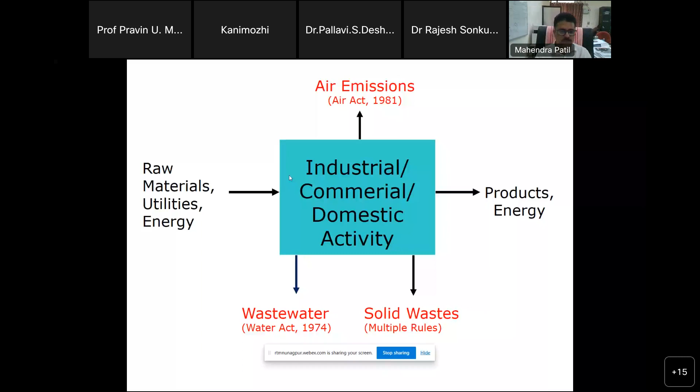And last one is battery waste. Battery waste is generated from electrical and electronic equipment in commercial and industrial applications. So these are the different types of waste generated from our day-to-day household, commercial and industrial activity. Since these are generated from different sources, they have different rules and regulations. So we'll see what are the rules and regulations associated with this waste.

So we will see quickly what are these wastes. First one and most dangerous is the hazardous waste. Hazardous waste is a solid, semi-solid or non-aqueous waste which is essentially generated by industry. When we say it is hazardous waste, it has to be from industrial sources. From household also we generate some hazardous waste like spent batteries, toilet cleaners, various cleaning agents, but the quantity as compared to industrial hazardous waste is very, very less.

So hazardous waste is defined by 4 chemical properties. The waste may have ignitability. Ignitability means potential of a waste to cause fire. Flash point is a criteria which is used to define the ignitability. Suppose the waste has a flash point less than 60 degrees centigrade, then the waste is called ignitable waste and it comes under hazardous waste. Another criteria for hazardous waste is corrosivity.

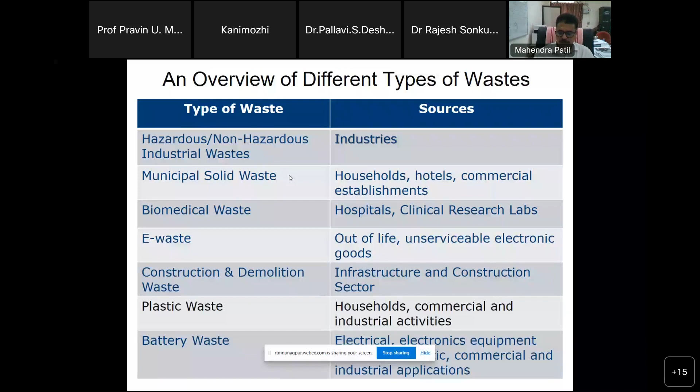Sir, slides are not changing, sir. So which slide are you seeing now? This slide you have seen, different types of waste. Okay. Yes, sir. So can you see the next slide now? Yes, sir. Yeah, this is hazardous waste, sir. Yes, exactly. So I'm discussing this slide now. Hope everybody is able to see this slide. Okay, sir. All of you are seeing? Yes, sir.

So as I told, hazardous waste is a solid, semi-solid, aqueous or non-aqueous liquid waste, which is essentially generated by industry. And hazardous waste is defined by four distinct properties: ignitability, corrosivity, reactivity, and toxicity. Waste is called ignitable if it has flash point less than 60 degrees centigrade. A waste is called corrosive if it has pH less than 2 or more than 12. A waste is called reactive if it reacts violently with water or air at normal temperature and pressure.

And waste is called toxic when it contains toxic heavy metals, pesticides, inorganics, and organics. So if waste bears any of these characteristics, then it is called hazardous waste. So typical sources of hazardous waste, as I told you, are from industry.

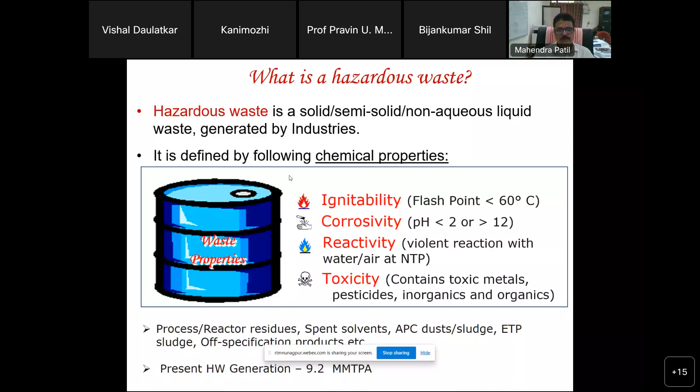Many times, if our products are not matching certain specifications, such products are discarded, and these discarded products also come under hazardous waste. So at present, based on the inventory done by various regulatory agencies like the State Pollution Control Board, it is estimated that India generates about 9.2 million metric tons per annum of hazardous waste.

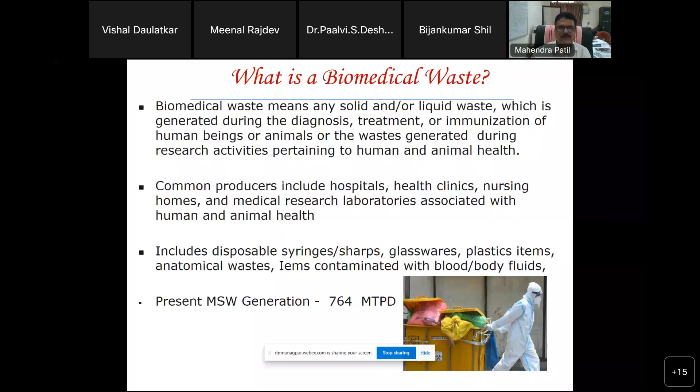Common generators of plastic waste include industry. They use huge packaging material, and a huge quantity of this packaging material is discarded as waste, which is plastic based. Then commercial establishments and households.

The plastic waste which is discarded includes plastic bottles like PET bottles, plastic bags, plastic films, packaging materials. We have seen during functions and marriages a lot of plastic cutlery used - plastic plates, spoons, bowls. So a lot of plastic waste is generated from such activities. Then toys, plastic toys, various consumer goods, textiles - these are all different types of plastic waste discarded from industrial, commercial, and household activities.

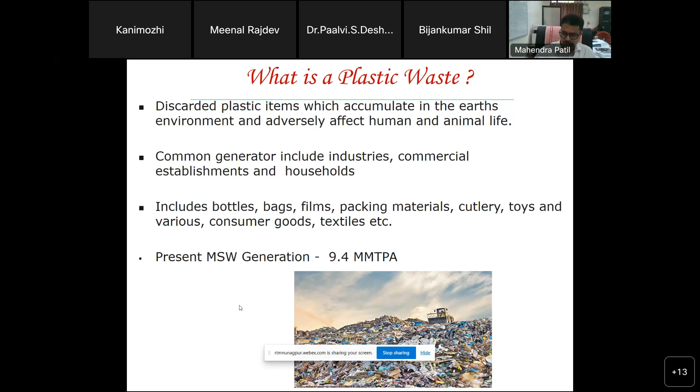E-waste is nothing but end-of-life electrical and electronic equipment, whole or in part, which are discarded as waste by consumers. Consumer could be household people, commercial establishment, or industry. So whatever electronic equipment we use, once the life is over, we discard it as a whole.

For example, if a washing machine can no longer be used, it is discarded as a whole, like washing machine, fridge, TV. But sometimes we give it for repairing. So during repairing, for example, someone will say the PCB has gone, the PCB needs to be changed. So it is repaired, and that part, the PCB, is discarded.

So it could be discarded as a whole, or it could be discarded in part. This is during manufacturing, refurbishment, and repairing process - whatever such waste is generated or discarded, that is e-waste.

Common generators of e-waste include industries, commercial, and domestic consumers. The type of e-waste includes IT and telecom equipment, TV, refrigerator, washing machine, air conditioner, lamps, industrial control panels - these are the typical e-waste which are discarded. It is estimated that about 3.19 million metric tons of e-waste is generated and discarded every year.

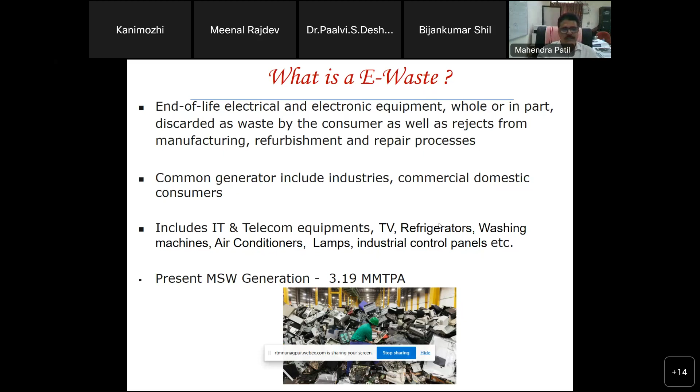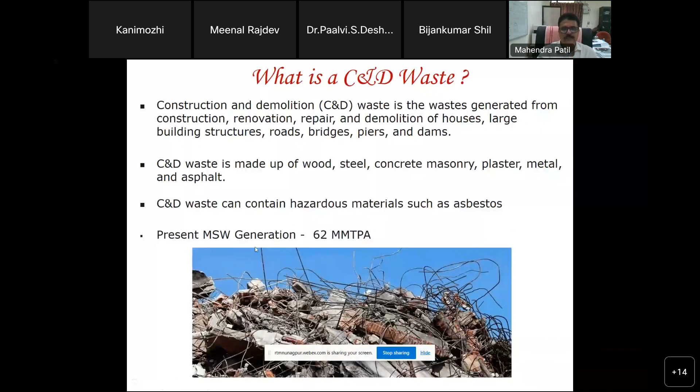Presently, construction and demolition waste generation amounts to 62 million metric tons per annum. Actually it is written MSW generation, but it should be C&D - construction and demolition waste - which is 62 million metric tons per annum generated in our country.

Similarly, battery waste is end-of-life batteries used in various electrical and electronic equipment, consumer products, and vehicles. Once their life is over, the battery is discarded as waste.

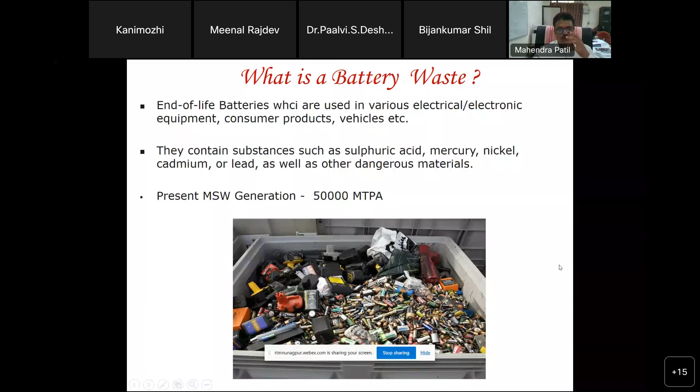So we have seen now what are the different types of waste which are generated. Now we will see what are the challenges associated with management of these different types of waste.

When we talk about challenges associated with this waste, this means we have to see what are the environmental concerns associated with it. Why is management of this waste so important? What happens if we don't handle, collect properly, and don't treat and dispose of our waste properly? What kind of environmental challenges or concerns can it have? So for this, we need to first review the historical waste management practices.

What we have been doing with our waste in the past many decades, and what environmental concerns have occurred due to this past waste disposal practices, we need to see. Then we have to also review what we have been doing at present with our waste. Based on review of historical practices, environmental concerns associated with waste management, and present waste management practices, we can develop a proper strategy for future waste management systems.

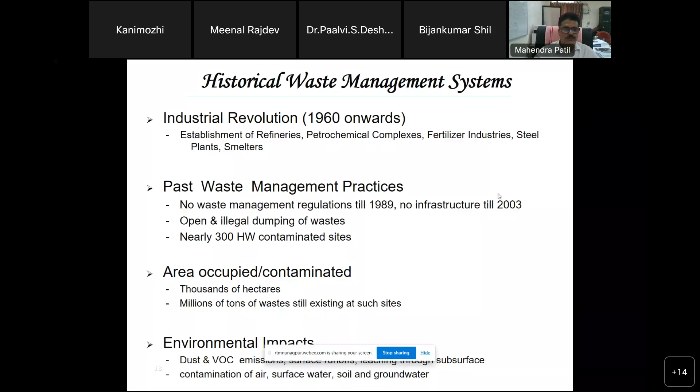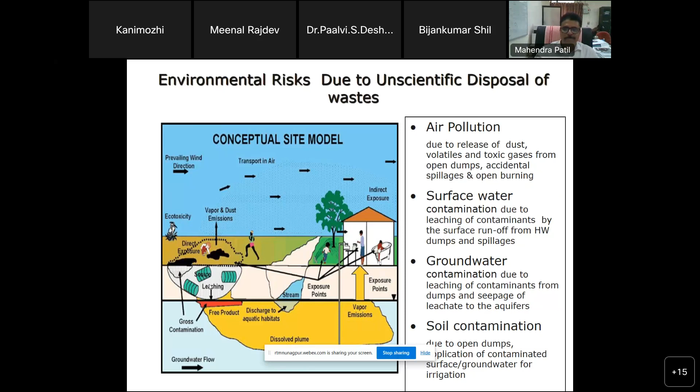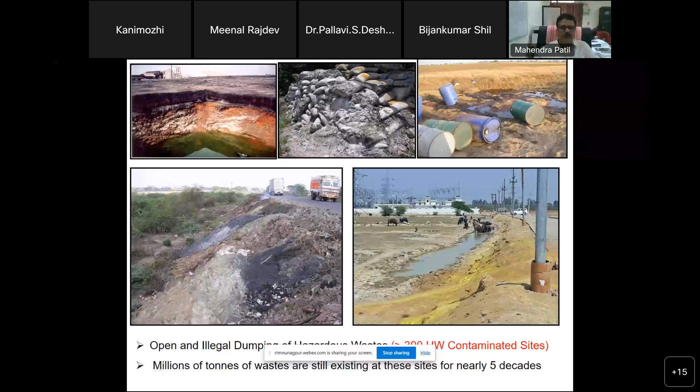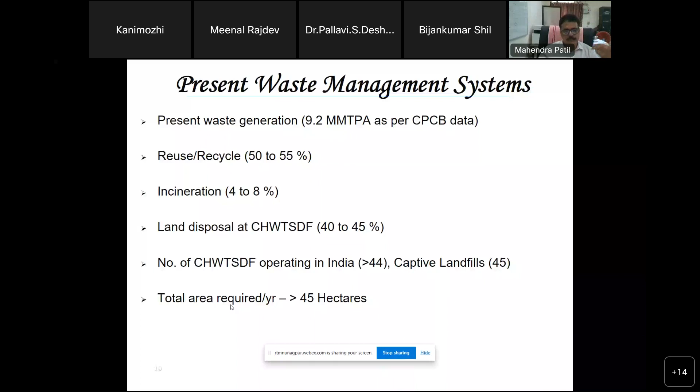Okay, now we have seen different types of waste, and I told you in the beginning, each waste, depending on the source, has different rules and regulations. For hazardous waste, actually the first legislation was notified in 1989, but it was observed that those rules were not very effective. So all these rules are frequently amended, depending on their implementation and the outcome of these rules. So for industrial waste, whether it's hazardous or non-hazardous, we have the Hazardous and Other Waste Management and Transboundary Movement Rules.

So the latest rule was notified in the year 2016. Similarly, for municipal solid waste, we have solid waste management rules. Again, these rules were amended in 2016. For biomedical waste, we have a separate rule called biomedical waste management and handling rule. Again, it was amended in 2016.

Similarly, for e-waste, we have a separate rule called e-waste management and handling rules, 2016. For construction and demolition waste, we have a separate rule called construction and demolition waste management rule. Plastic waste, we have a separate rule, plastic waste management rule. Similarly, for battery waste, we have battery waste management rule.

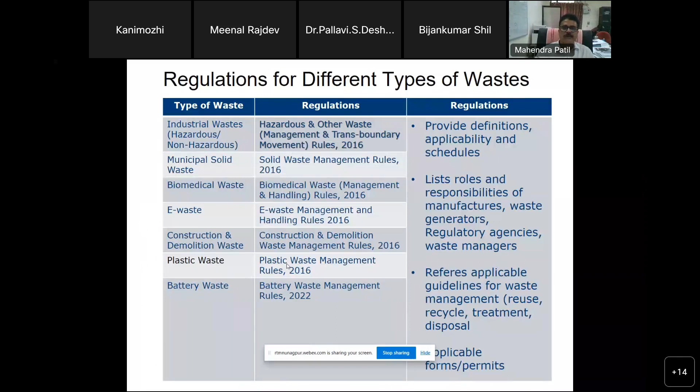This is an example of again regulation on hazardous waste: the Hazardous Waste and Other Waste (Management and Transboundary Movement) Rules, which were last amended in 2016. As per these rules, there are a total of 8 schedules. Schedule 1 lists 38 industrial processes which are likely to generate hazardous waste. So all kinds of industries existing in India are listed there, and what kind of hazardous waste is generated from these 38 industrial processes is also listed. Then there is Schedule 2.

Schedule 2 is again divided into Class A, Class B, and Class C. Schedule 2 provides the leachable concentration of the hazardous constituent in the waste. For example, I am an industry. I generate say 10 tons of ETP waste. So if my ETP waste contains say more than 50 milligrams of cyanide, this becomes hazardous waste.

If it contains say 20 milligrams of leachable concentration of mercury, then it becomes hazardous waste. So like this, there are Class A, Class B, and Class C, which provide different concentration limits for various hazardous constituents. Then there is Schedule 3, which deals with hazardous waste which is either imported or exported. A lot of wastes are imported and exported for reuse, recycle, treatment, and disposal.

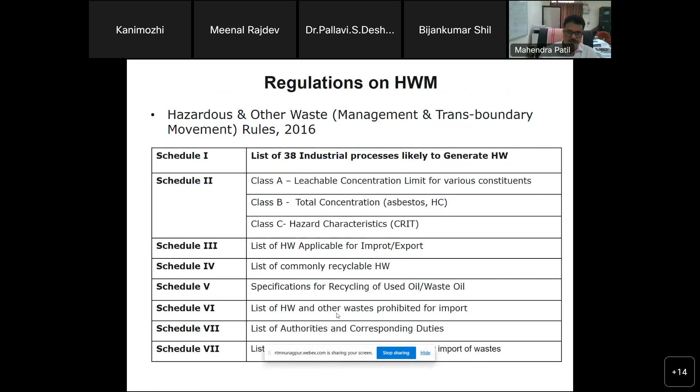This is an example of Schedule 1 of the Hazardous Waste Rules 2016. You can see, hope you are able to see this slide. Schedule 1, HWM Rules 2016. Yes, sir.

Yes, sir. Okay. So you can see the first column, there is an industrial process, for example, petrochemical process and pyrolytic operations. So if the industry falls under this category, petrochemical industry, there are 9 types of hazardous waste generated from this activity. So like this, total 38 industrial operations, 38 industrial processes have been listed in Schedule 1.

So you can see if you are studying any industry, suppose it is say a petroleum refinery. So the petroleum refinery will generate oily sludge emulsion. It will generate spent catalyst. It can generate spent slop oil. It can generate organic residue. It can generate chemical sludge from ETP. So it is very well defined what kind of hazardous waste are generated from the different activities.

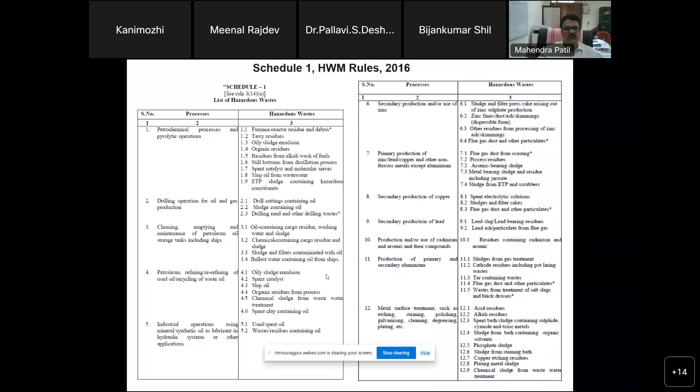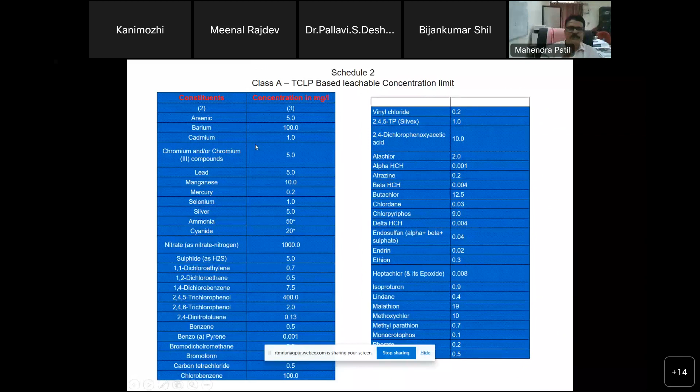This is an example of Schedule 2. I told about a different concentration of hazardous constituent present in the waste. Suppose I generate a waste, and if it contains say 5 milligram per liter leachable concentration of arsenic in the waste, then my waste becomes hazardous waste. So like this, there are almost 46 parameters which are listed. So we have to see whether the waste contains any of these parameters. If it contains any of the parameters, then the waste is categorized as hazardous waste.

Suppose I'm having an industry. I'm generating at present say 500 tons of waste per year. So whether I can bring it down from 500 tons per year to say 50 tons per year or 100 tons per year, and what are the options available for minimizing the waste, I need to do this study.

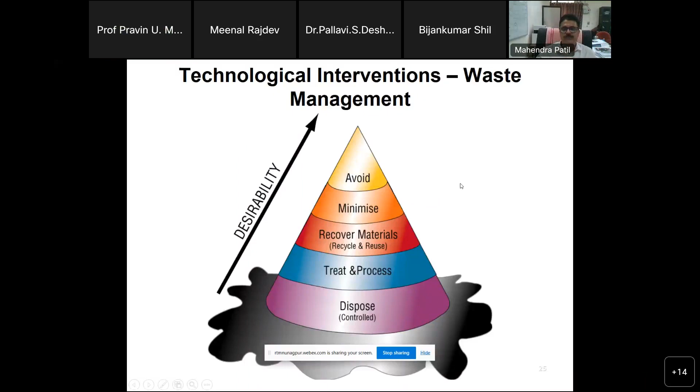So we'll see what are the examples. This slide, the option was option 1, avoid waste generation. You can see this slide? Yes, sir. Yeah, it is visible, sir. Yeah. So this is just an example.

I'm showing the example. We have seen in the previous slide, the option was to avoid waste. So here an example, this is for caustic soda industry. Caustic soda, you might be aware, previously the process used for caustic soda was mercury cell process. In this process, mercury was used as one of the raw materials. So whatever waste or sludge was generated from the mercury cell process, it used to contain a lot of mercury. So it was a hazardous waste.

But then a lot of research was done and an alternative process was developed. This is called membrane cell process. So in the membrane cell process, mercury is not used. So the sludge generated from this membrane cell process is not a hazardous waste. So simply by changing from one process to another process, we have avoided the waste generation.

Nowadays, the membrane cell process doesn't generate mercury sludge. So what I mean to say is, if we go for cleaner and greener production processes, we can avoid waste generation. You might have heard the term green chemistry. Green chemistry is a process to manufacture any product without generating any secondary pollutant such as hazardous waste. So this is an example of how we can avoid waste generation, simply by going for a cleaner and greener production process.

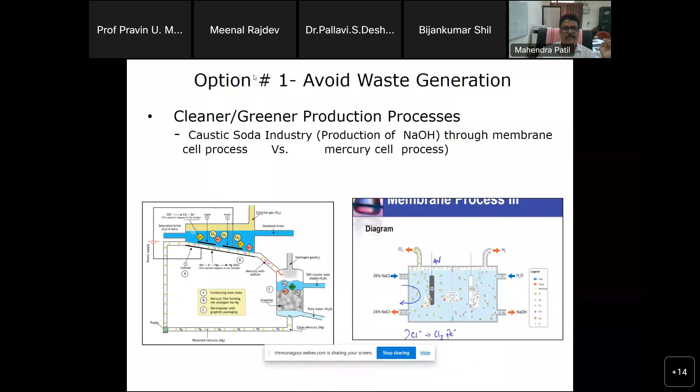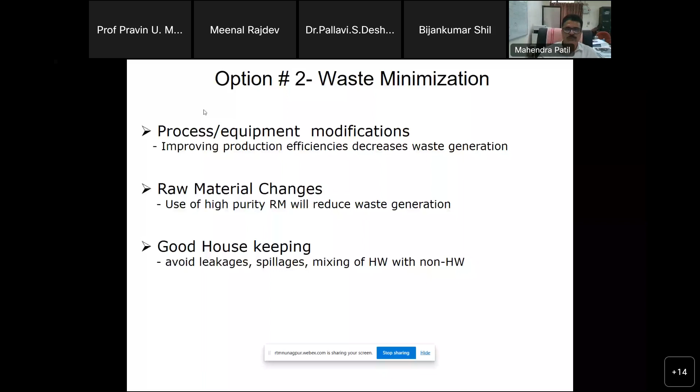The third option is recovery, recycle, and reuse. As I told you, some waste is likely to be generated and you're not able to minimize it 100%. So whatever waste is generated, we have to see whether it can be reused, recycled, or recovered for any purpose. There are two options. One is on-site recycling - for example paper, plastic, kitchen waste, everything.

If we do proper segregation, we can recycle the paper by giving it to the Raddiwala and get some revenue. If we segregate plastic and glass bottles and give them to the Kabadiwala, he will give you some money. Proper segregation helps recover, recycle, and reuse the waste. This is on-site recycling. The same applies for industry - waste generated by an industry could be utilized in some other process of the same industry. That is called on-site recycling.

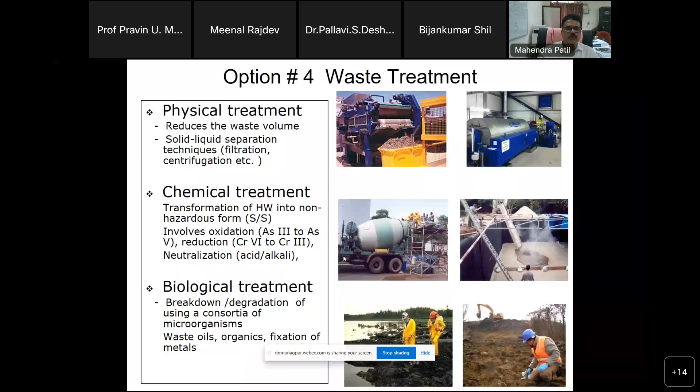So with physical, chemical, and biological treatment, the waste can then be disposed of in a controlled manner. This is the fifth option, the last option, which we call the ultimate and final waste disposal option. There are two systems available, two technologies available for ultimate disposal.

Suppose if we consider human beings, when a human being dies, we either cremate him. If you visited crematoria, we either burn him, or depending on the religion, if Hindu people will burn him, Muslim people will go for...

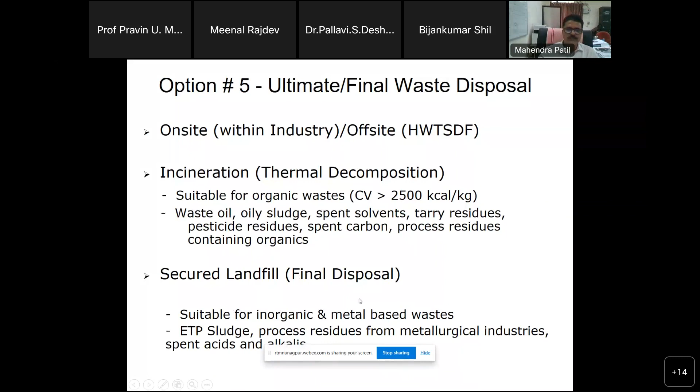Examples include ETP sludge, process residue from metallurgical industries, spent acid and alkalis. So all such waste, if it has no use, has to be disposed of in a landfill.

The gases generated during combustion are further incinerated or further combusted. They are treated through various air pollution control equipment and discharged to the environment. Whatever ash is generated in the process is collected and disposed of in a secure landfill.

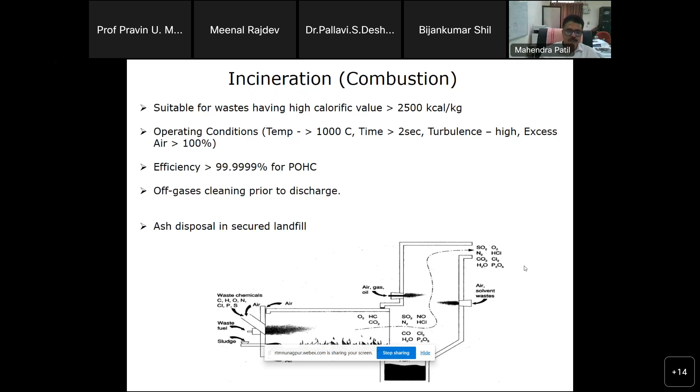So finally, the secure landfill is a containment system which is designed and constructed to contain the waste so as to minimize release of contaminants to the environment.

Before putting the waste in the landfill, as I told you, it has to be treated chemically. We need to solidify and stabilize this waste. There are guidelines given by the Central Pollution Control Board on how hazardous waste incinerators should be designed and operated, and how secure landfill systems are designed and operated.

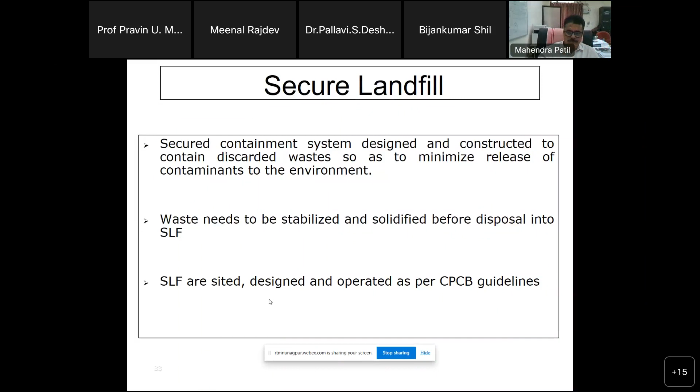Before the waste is disposed of, we need to select the site which can be developed into a secure landfill. The area is excavated, and then there are different layers of liners. First, we have a 150 centimeter clay liner placed. Above that, we use an HDPE liner of 1.5 mm thickness. Above that, we need to provide a leachate collection system. And then there is another set of clay liner and synthetic liner. So it is a very, very secured system.

This liner system is placed, and then we start disposing of the waste. Each landfill has a capacity, designed for say 20 to 25 years. So once you construct the landfill, you go on putting the waste for 20 to 25 years. When its capacity is over, then it has to be finally covered.

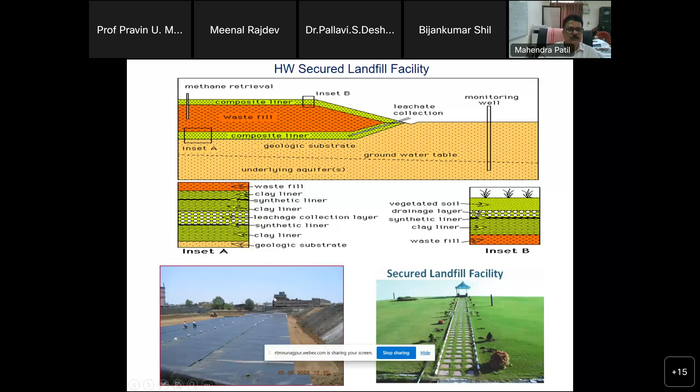So this is the last option for any waste management. These are some of the pictures of how the secure landfill is constructed. Similarly, the options for municipal waste management - we have seen for solid waste, hazardous waste.

Now these are the treatment options for municipal solid waste. Again, for proper management of municipal solid waste, waste has to be properly collected and segregated so that it can be recycled to the maximum extent. This is valid for the dry fraction like paper, plastic, glass, metal. It can be collected, segregated, and recycled.

The second fraction of municipal solid waste is our leftover food, we call it wet waste. This wet waste can be subjected to anaerobic digestion. You can generate methane, and this methane can be used as a source of energy, for producing power. So this is the second option for municipal solid waste management.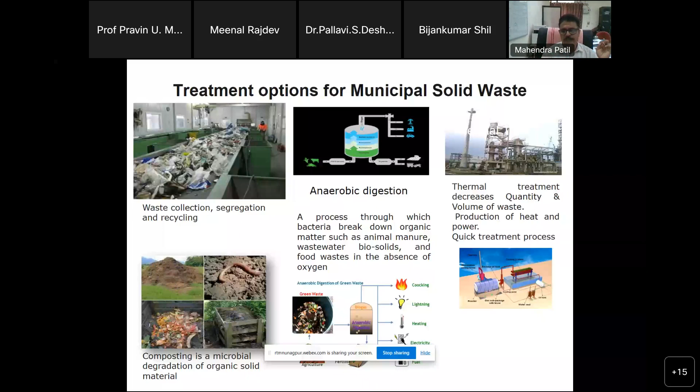The third option is thermal treatment, like incineration. Whatever mixed waste is generated, you subject it to thermal treatment at 850 to 900 degrees centigrade. If you generate some energy, this energy can be recovered and utilized for generating power. So these are the options for municipal solid waste management.

NEERI is associated with management of municipal solid waste in Goa. We are working as an expert agency to them, and we have helped them design and construct a plant for management of municipal solid waste. As of now, this is one of the best plants existing in the country for municipal solid waste management. The waste is collected by the local municipal corporations and panchayats. There is a lot of awareness among residents in Goa - the Government of Goa has run various awareness programs, and people collect their waste in two different fractions, dry waste and wet waste, and it is collected and transported separately. It comes to this plant, which is designed for a capacity of 250. There are two plants: one is 250 tons per day, the other is 100 tons per day.

Here, whatever dry fractions are received are further segregated into 10 fractions - paper, plastic, metal, and so on - and it is reused and recycled to the maximum possible extent. The wet waste here is converted to biogas, and they have captive electricity production using this biogas. Whatever residue is generated after biogas generation is converted to compost. So if you happen to visit Goa and are interested, you can visit this plant. This will show you how municipal solid waste is managed in a safe, scientific, environmentally sound manner. It is worth visiting.

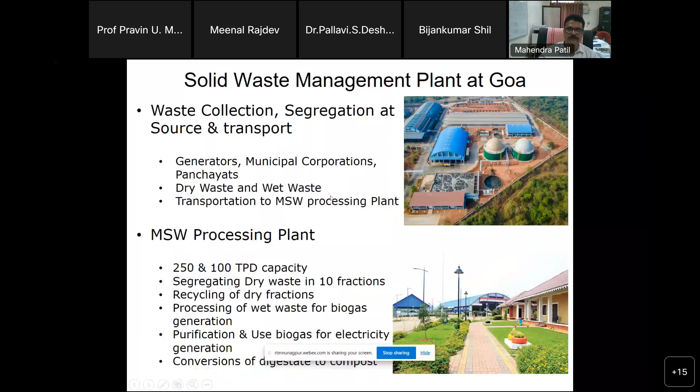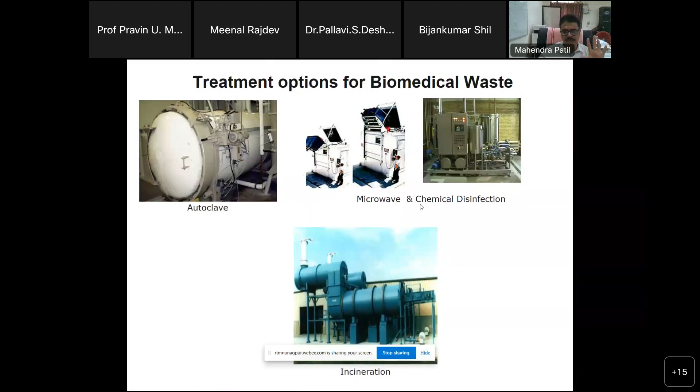Similarly, for treatment options for biomedical waste, you can go for autoclave, microwave, or chemical disinfection, and ultimately whatever residue like anatomical waste or plastic waste is there, with no option for reuse or recycle, it has to be discarded through incineration. Incineration is the ultimate option for biomedical waste.

Similarly, for plastic waste, first we have to reduce the generation of plastic waste. Then whatever plastic waste is generated, we have to reuse, recycle, and recover, and only a small fraction which you cannot do anything with can go to landfill. But ultimately, landfilling of plastic waste is to be avoided. It has to be reduced, reused, recycled, and recovered. Okay.

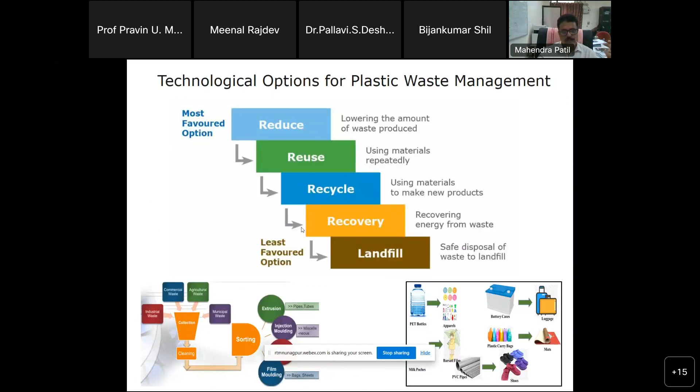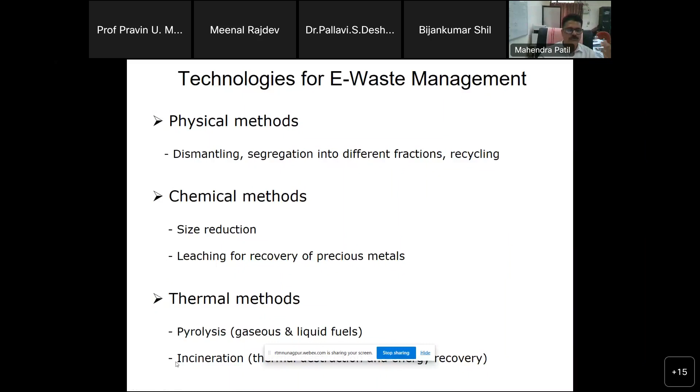There are also thermal methods available like pyrolysis, for generation of gaseous and liquid fuels, and any residue like plastic residues, you need to go for incineration. So this is how the waste can be managed.

As far as NEERI is concerned, we have been working in solid and hazardous waste management for almost the past 35 years. We deal with municipal solid waste, hazardous waste, biomedical waste, all kinds of waste. We do basic and applied R&D. We have very good teams of chemical engineers, environmental engineers, mechanical engineers, biologists. We have various tools and software available, and a very good laboratory with analytical facilities.

So with this infrastructure, skill and highly qualified manpower, we have been dealing with this waste for the past 3 decades. We have done more than 100 projects on various issues of solid and hazardous waste management. In this process, we provide our services for waste inventory, waste audit, waste treatment, waste minimization, reuse and recycle, environmentally sound management, and remediation of contaminated sites.

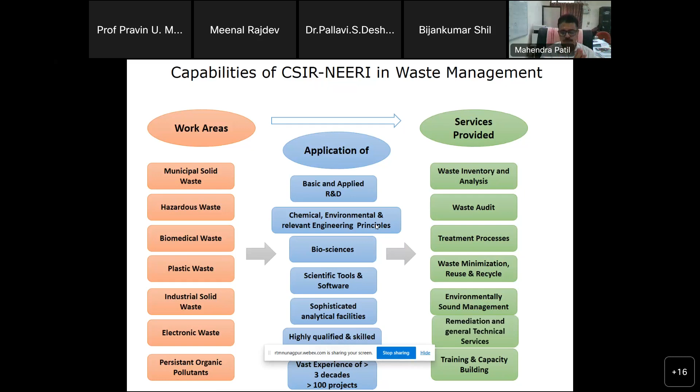We also conduct a lot of trainings and capacity building programs. If you visit our website, a calendar of all such training programs is available. So if any one of you is interested, you can avail our services for any of the activities. Okay.

These are some of the significant projects we have done in the past. This one is full-scale treatment and disposal of arsenic waste. Here we have disposed of almost 700 tons of highly toxic, highly hazardous arsenic waste at Zuari Industry, Goa. Right now, we are doing a full-scale remediation project for a mercury contaminated site at Kodaikanal.

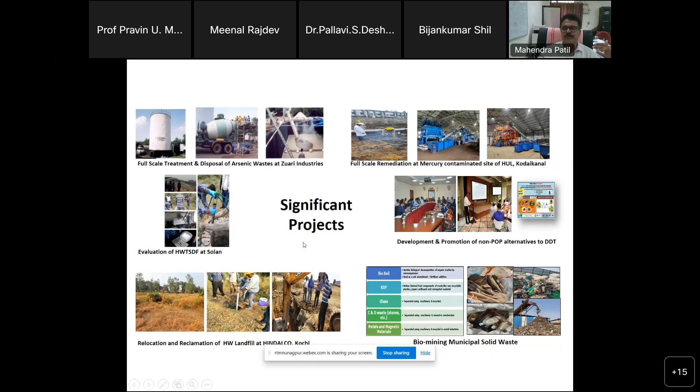We have done one project recently at Hindalco, Cochin, where the hazardous waste generated by the industry has been safely collected and disposed of. We are also doing many projects for municipal solid waste like biomining, treatment, disposal. So these are some of the projects we have done in the recent past.